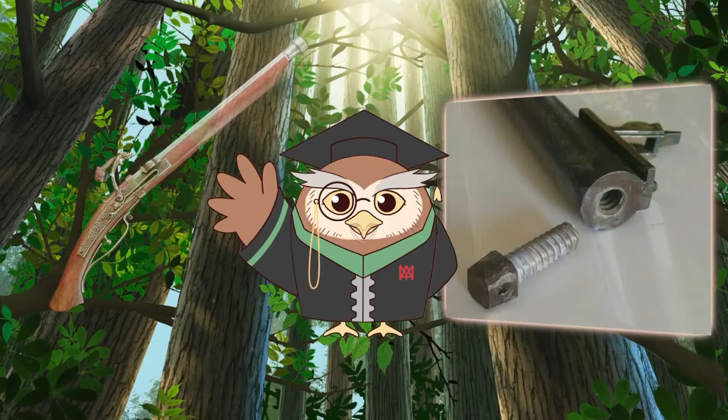The YAMAWA forest is a forest full of threading tools. The history of cutting threads has been ongoing since the Middle Ages. In the West, Leonardo da Vinci drew a diagram of a machine for cutting threads. In Japan, matchlock guns were introduced from Portugal in the 16th century. This began the history of cutting thread.

Let's study about cutting taps this time. So, let's get started.

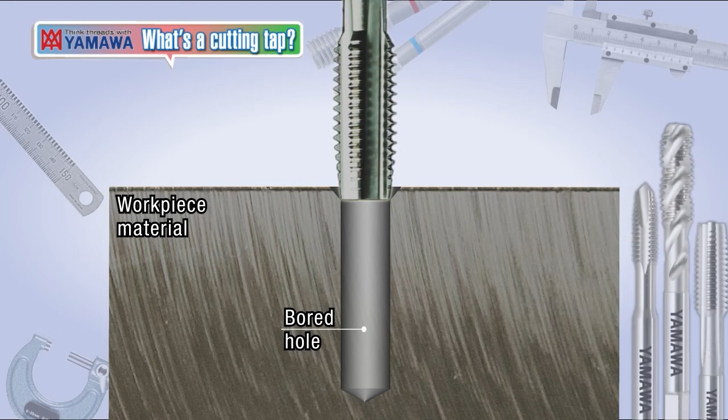A tap is an externally threaded tool that forms an internal thread in the bored hole by rotating and feeding in according to the lead of the tap's thread.

Taps can be broadly divided into cutting taps and roll taps. This time we will introduce you to cutting taps. The cutting tap is divided into hand taps, spiral fluted taps, and spiral pointed taps according to the shape of the flute.

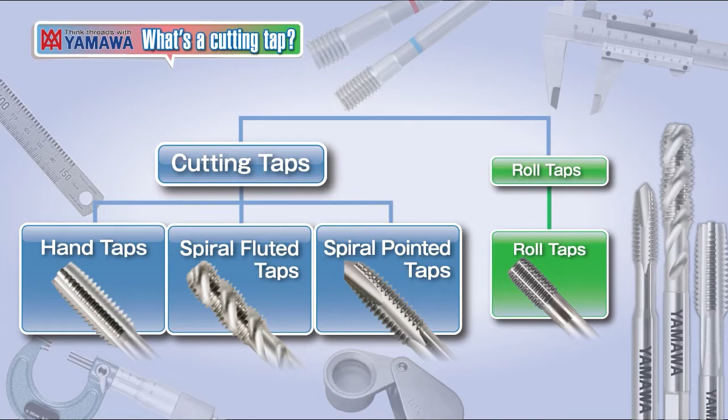So let's start with hand taps and go from there. Hand taps are characterized by their straight flutes and, as the name suggests, have a long history of being used by manually turning them by hand.

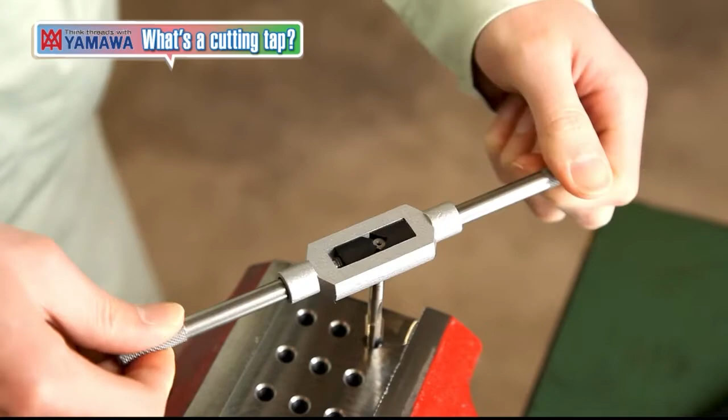Hand taps can be used for both blind holes and through holes due to their structure that stores the fine chips in the flute.

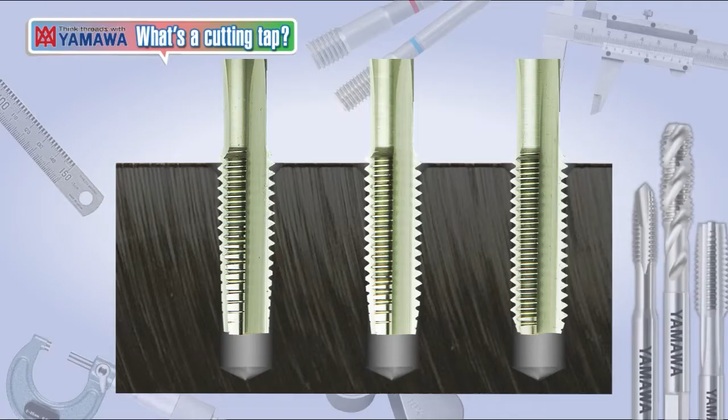There are three types of hand taps depending on the chamfer length: taper taps, plug taps, and bottoming taps.

Hand taps have a very strong cutting edge, making them ideal for tapping hard materials and hard brittle castings. In addition, the straight flutes make them easier to resharpen.

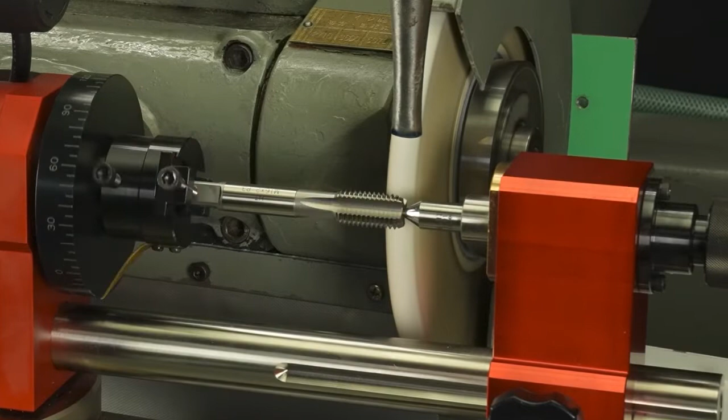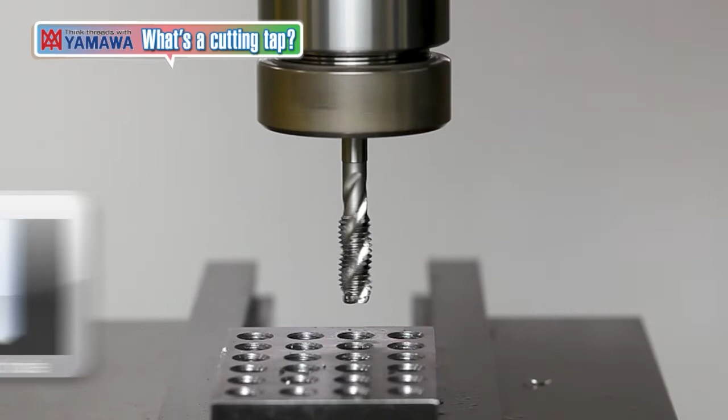A tap with a helix flute is called a spiral fluted tap. Spiral fluted taps have helical flutes that eject the finely curled chips backwards out of the hole. This makes it suitable for tapping blind holes.

Spiral fluted taps are suitable for threading sticky materials because of their sharpness.

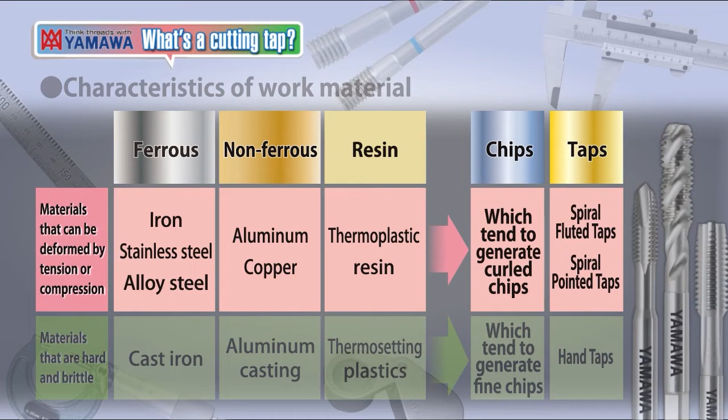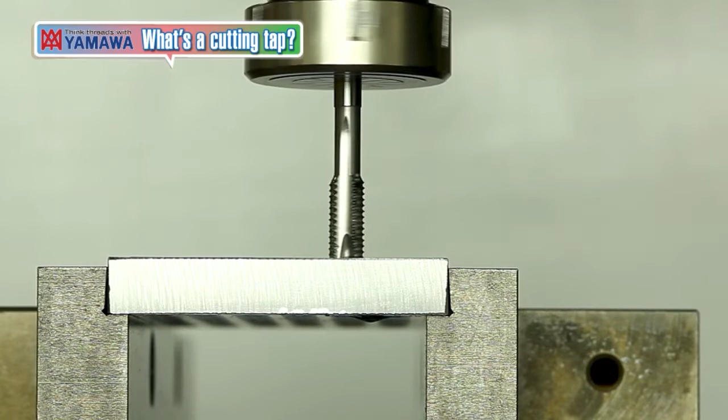A tap with additional slanted flutes, called a gun shear flute, at the end of the tap is called a spiral pointed tap. The chips are pushed forward and ejected at the other end of the hole. It is suitable for machining through holes because it pushes chips forward. This results in better chip evacuation, and the shallow flutes make it less prone to breakage. Spiral pointed taps have relatively low torque and can be used on machines with lower horsepower.

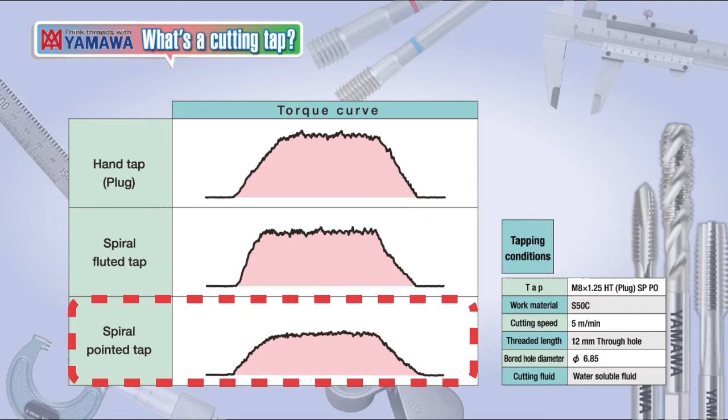This section explains the five main parts of a tap and their functions: the chamfer, the full-threaded part, the flute, the shank, and the shank square.

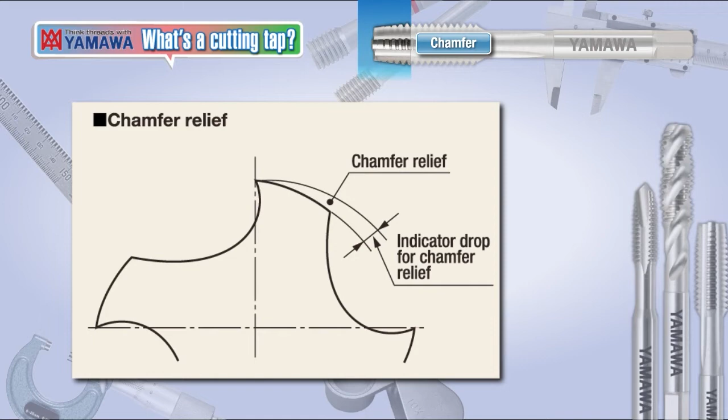The chamfer is directly involved in the cutting of the internal thread as a cutting edge. The amount of material that each tooth cuts is determined by the chamfer length and the number of flutes.

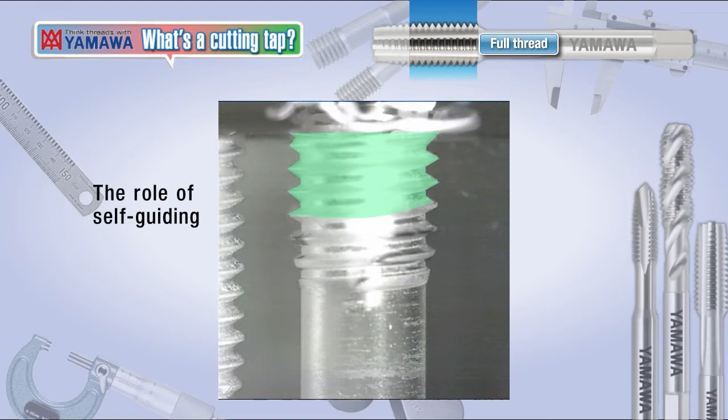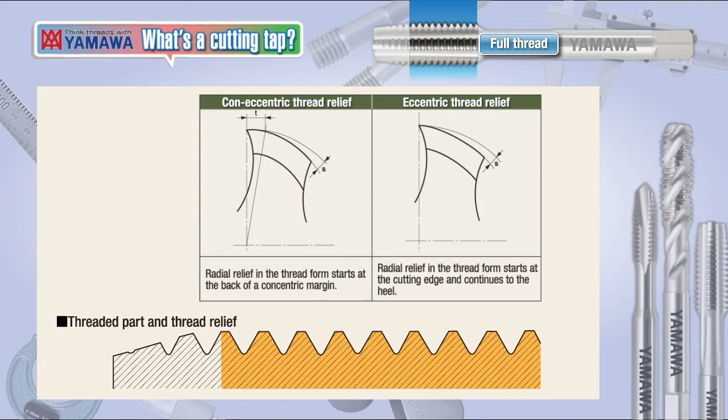The full thread enters into the thread cut by the chamfered part of the tap and serves as a guide as the tap continues deeper into the hole. Generally, taps have a certain amount of true circle from the cutting edge to maintain self-guiding properties.

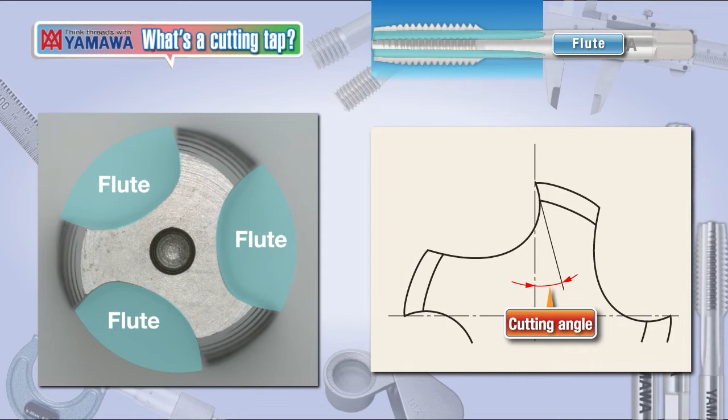The flute forms the rake angle, which is the most important part of a cutting tool. It also plays a large role in the containment or discharge of the chips and the supply of cutting fluid.

The shank is responsible for holding the tap in the chuck or holder. The square on the shank serves as a stopper to prevent the tap from spinning or falling out when it is attached to the holder.

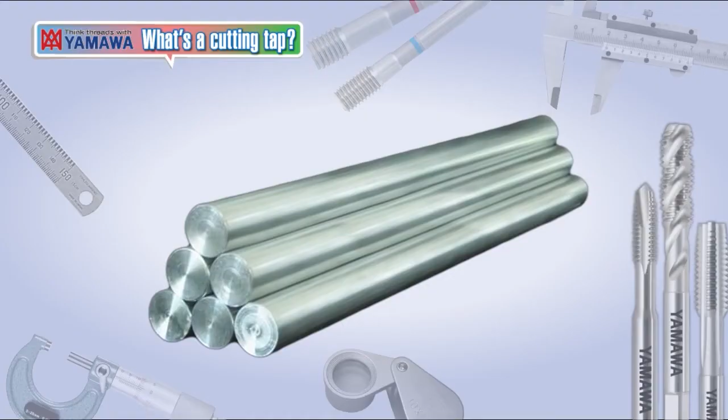Tap materials are mainly divided between high-speed tool steel and cemented carbide. Generally, taps are made of SKH51 or SKH58, equivalent to molybdenum-based high-speed tool steel.

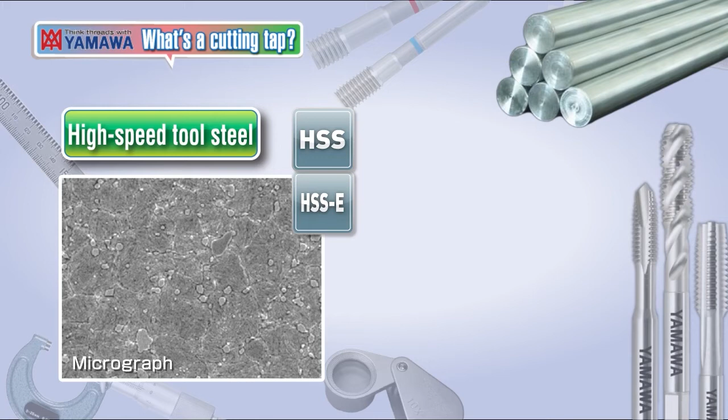Cobalt HSS is used for high-speed cutting, and powdered HSS is used for difficult-to-cut materials.

Cemented carbides are used in the machining of heat-treated hard materials, ultra-high-speed machining of aluminum and cast iron, as well as in machining that requires increased durability.

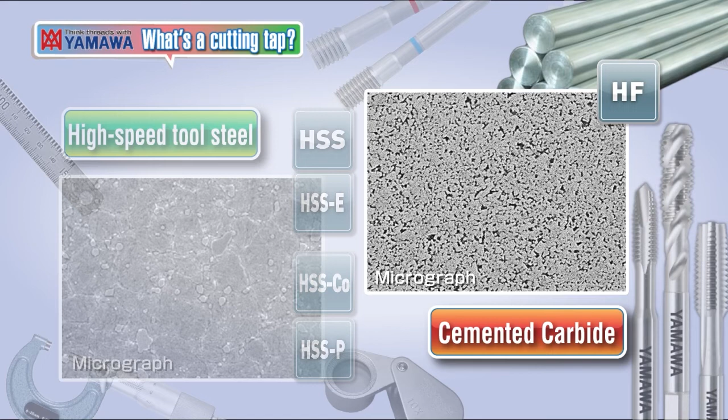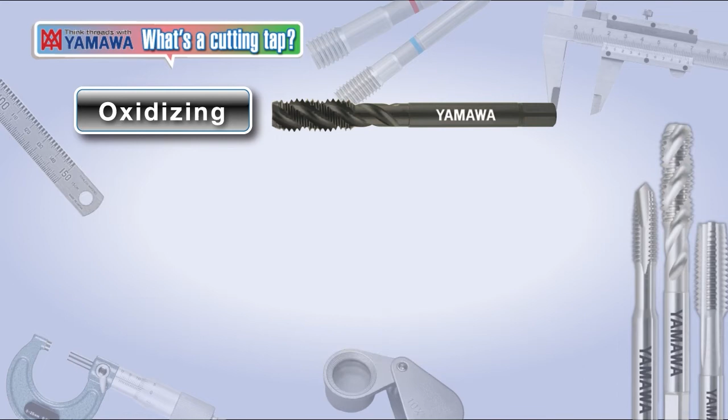Surface treatment for taps includes oxidizing, nitriding, and PVD coatings. The black-colored surface treatment is called oxidizing. The purpose of this treatment is to prevent welding of steel materials and to improve the surface finish of the internal thread surface.

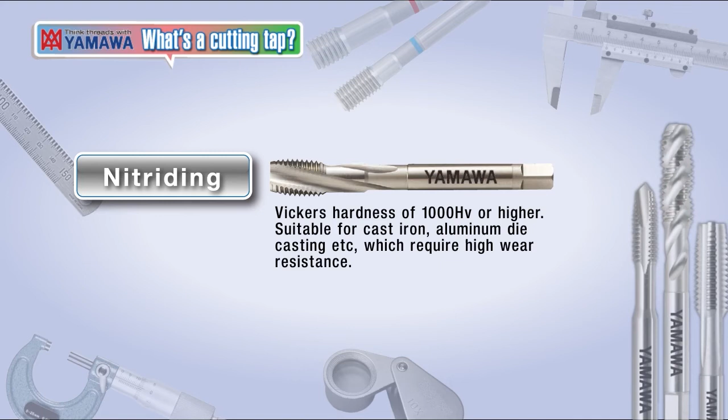The grayish surface treatment is called nitriding. A hard nitriding layer of 1000 HV or more permeates the surface of the tool, making it suitable for machining cast iron, aluminum die castings, etc., where wear resistance is required.

Coatings are used for high-speed machining and longer tool life. Tap coatings include TiN, TiCN, TiAlN coatings, and others.

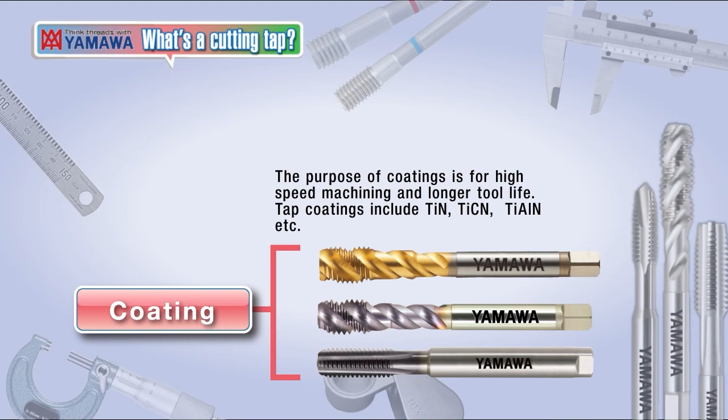That's all for now. In this article, I have explained about what is a cutting tap. There will be more in this series, so please stay tuned.